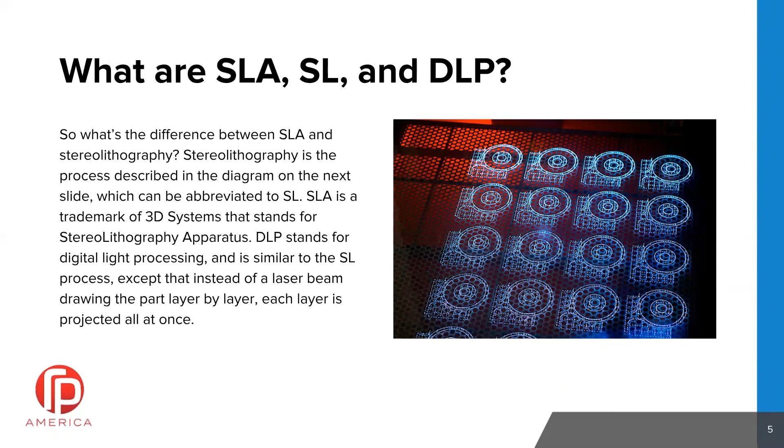So SLA, SL, and DLP. What is really the difference here? So stereolithography, or SL, is the typical abbreviation. Most people are familiar with SLA. That term is trademarked by 3D Systems, and it stands for stereolithography apparatus. DLP, that's digital light processing. It's very similar to stereolithography, except that instead of a laser drawing each area of the model itself, the DLP will actually project an entire image all at once.

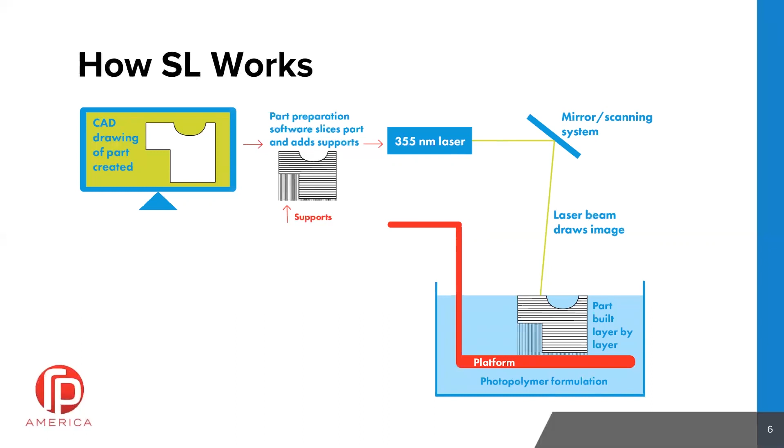So how does stereolithography work? You have a CAD drawing. That's the first part to pretty much any 3D printing operation: you need to have the CAD file. Then we take that CAD file, typically STL, and we will take that into the slicing tool, which will generate support structures as well as break that model down into individual layers. We use a 355 nanometer laser, and that hits a mirror, which we call the scanning system. And then that scanning system is what actually draws the part. So for each layer that's created, the platform will actually drop into the vat of liquid. A recoater blade will sweep across and level out the liquid as well as remove any air bubbles. And then we just repeat the process until it's finished. And when it's done, the part automatically just raises up out of the liquid and starts to drain.

So the foundation years, we're going all the way back to 1982. Acrylate-based formulations were the norm back then. They required speed of reaction and overall cure to generate the properties for early stereolithography. The materials were usually very highly viscous, so they were really thick, and there were complications that come along with viscous materials like that, so the recoating challenges and things like that. There were also problems with shrinkage, curling, or distortion. Large parts were not very accurate across a wide range or a large size. So part accuracy was kind of a problem.

Poor strength of the laser cure. With the resins, we were really starting to understand how the process works. So we ended up having poor green strength. The parts were very brittle. Acrylate chemistry in general is a difficult chemistry to get accurate and keep accurate. So that's kind of how it started. And this is really a big part of the misconception moving forward.

Stereolithography, generally people think that it's really expensive and the parts don't last. If the part gets knocked off the table, it's going to break. That was the case in 1982. That's no longer the case at all. If I am presenting in front of people, this is where I'll take parts and literally throw them on the floor. They hold up, they're durable. Different materials have different properties, and it just all works out better.

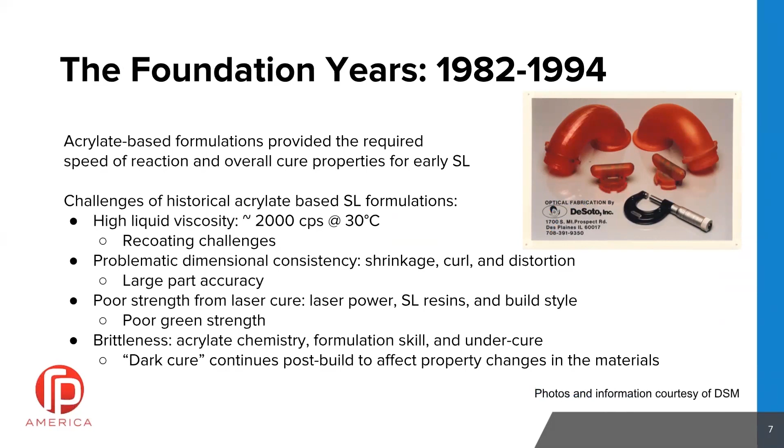So as the years progressed, we get into the 1993 timeframe. We get into these epoxide acrylate hybrid materials, and you can kind of see here the physical strength and the physical properties greatly increased when we get into the epoxy based resins.

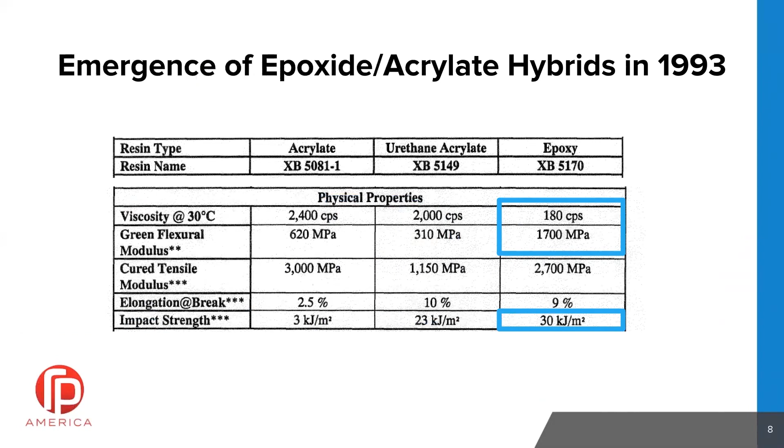So then we move into the expansion years. We start to really understand what the chemistries can do for us, and try to mimic materials that have the properties of thermoplastics, like ABS for injection molding. If you're not terribly familiar with ABS, that is Legos. That's the #1 thing that people will think about when you think about ABS.

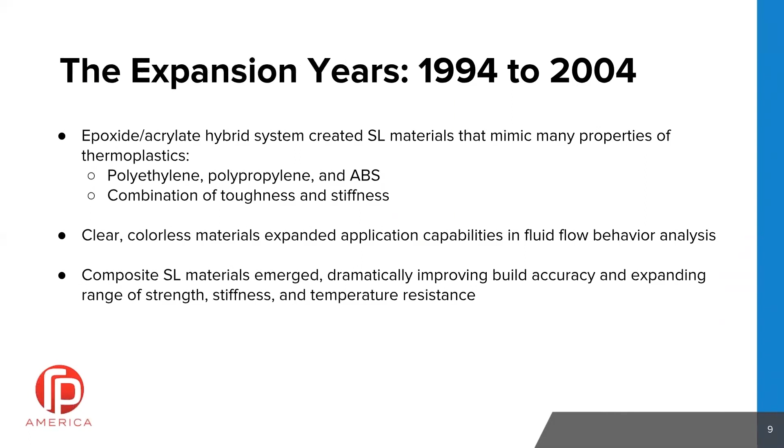Also, we can get into now clear and colorless materials, expanding the capabilities in fluid flow behavior analysis, allowing people to see what's going on or turbulence inside of clear parts that are used for prototyping or material development. Then the composite materials begin to emerge at this point as well. We're going to talk a little bit about composite material here in a few minutes. So we're moving toward that engineering thermoplastics. That's the goal.

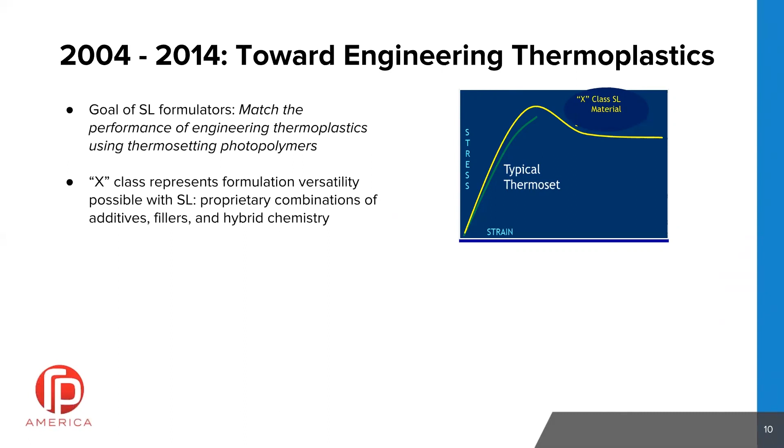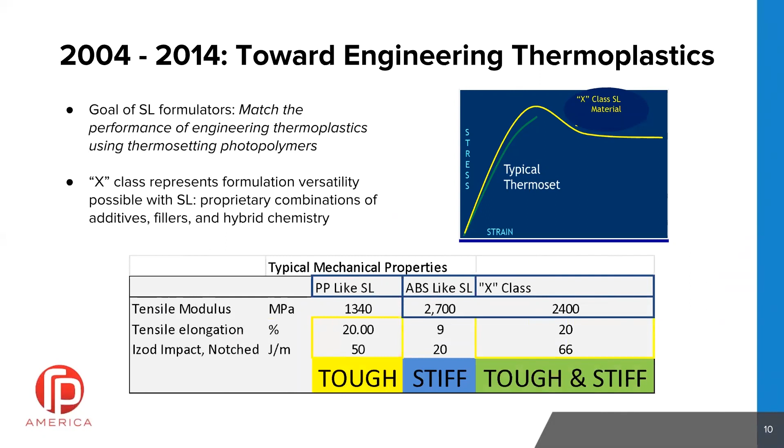So they developed what's called an X class, which is kind of like the next version, or they were really shooting for greater material properties, and so that's where this X class kind of develops from. We're creating materials that have very tough properties, high impact resistance, also decent elongation. ABS is more stiff, so we have a little less elongation, okay impact type of resistance. But when we get into that X class, now we're talking about really good elongation and good impact resistance.

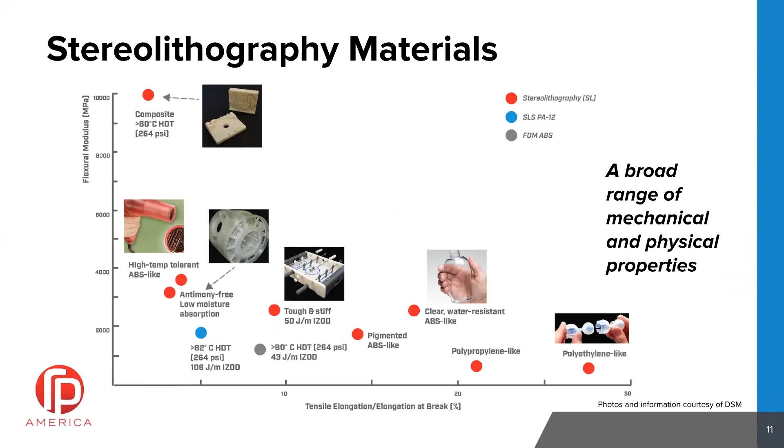So this is just a little graph showing the flexural modulus as well as the tensile elongation at break. And you can see if you want parts that are not flexible but have a really good temperature resistance, now we're looking up in those composite materials. If you're looking for materials that have a much less flexural modulus but are really good in the tensile strength, then now you're talking polypropylene-like materials, and there's just all kinds of materials. There's a wide range out there.

So these are some of the materials we're going to be talking about today. First, I'm going to discuss some of the DSM materials. We're going to talk about Evolve, Next. A couple of the clear materials, 11-122 and 10-122. Taurus, which is a great new and up-and-coming material. And Perform. Perform's been around for a while, but this is one of those materials that have an additive that actually gives a lot of strength and different properties.

Then we're also going to talk about a couple of new players out there. BASF has a great new material, and Adaptive 3D, tough rubber. And when we get to that, we'll discuss that a little more as well. So let's jump in here. First, we're going to talk about Evolve.

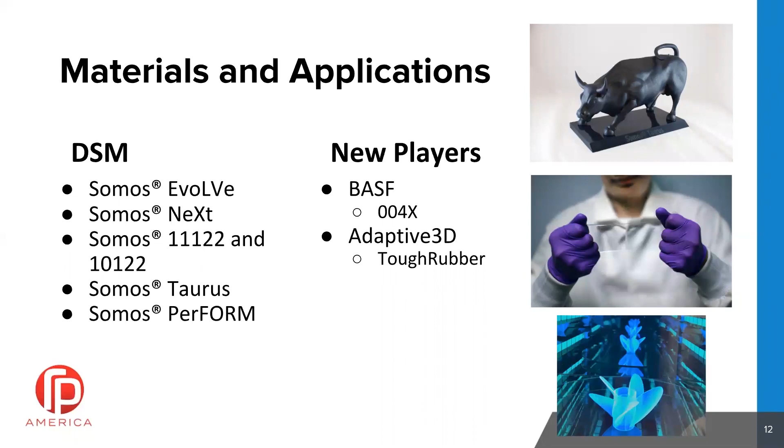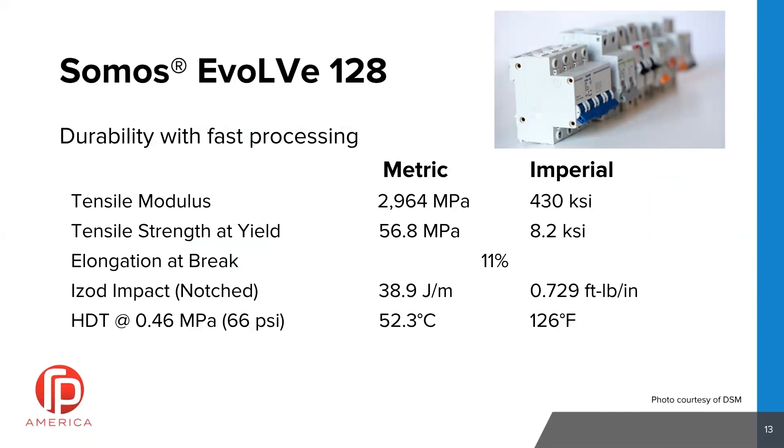So we have some good material properties here. You can see we have really nice tensile modulus, elongation at break, 11% is not too bad. Good temperature resistance as well. 126 degrees Fahrenheit's not bad. It's not going to withstand under the hood type of applications, but most prototyping applications it'll be just fine. So here's an example of Evolve actually being used.

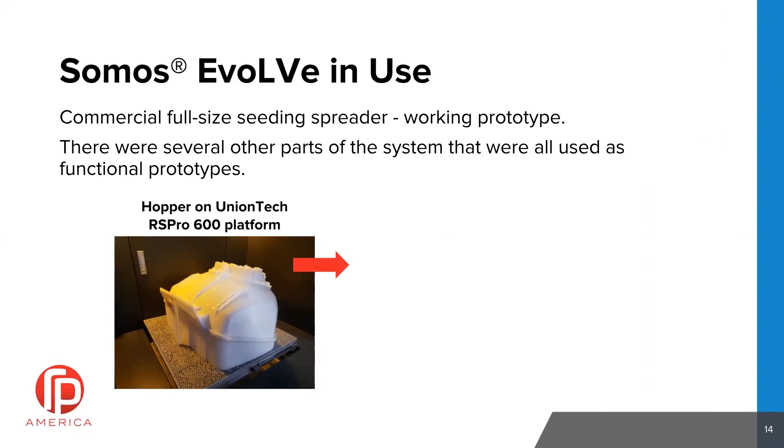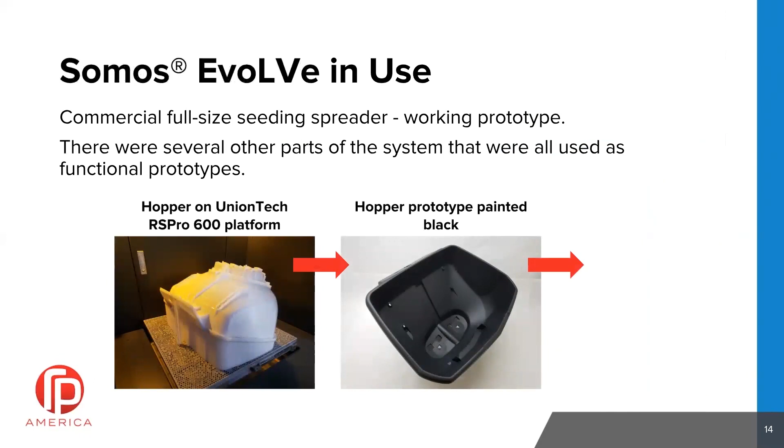So this is a print that came off of one of our printers, our 600 platform, and this was a customer of ours that was doing a prototype for a company. And so they actually built that on our platform. And when I first saw this image, I thought it was just a CAD rendering, and turns out this is a physical picture of the part after it was painted. So printed, cleaned up, painted, and here it is in the full assembly prototype.

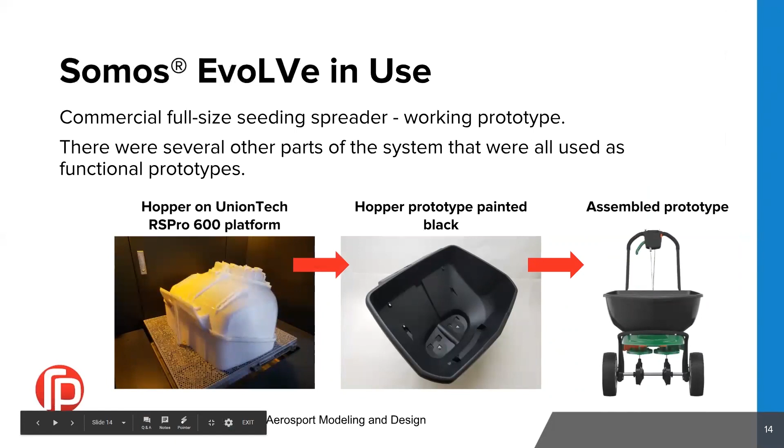And what's interesting about this particular assembly prototype is any of the parts on this prototype that were plastic were actually printed, including the wheels. So the wheels themselves were printed. The shaft or the axle that holds the wheels, that's obviously not. The handlebar, that's metal, that's not. The cables are not. But every other component on the inside that is actually plastic has actually been printed on this part. So functional prototypes, just to open your eyes a little bit, think about how things can be done.

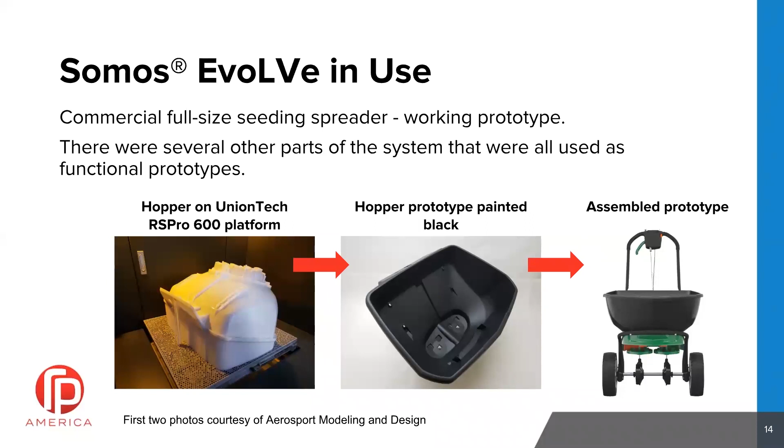Large sizes, very capable. Our 600 is around a 2-foot platform; 600 millimeters is what that 600 represents. So 600 by 600 in the XY. Next, so this is part of that X class of materials.

And so we're getting the best of both worlds here. We have good tensile modulus, we have really good strength at yield. The elongation is a little less, but the temperatures are getting higher. So the impact resistance is also really good on this as well. That image there with the hockey sticks, those are actually 3D printed blades, and you can use them to play hockey. They're that tough, and they will hold up.

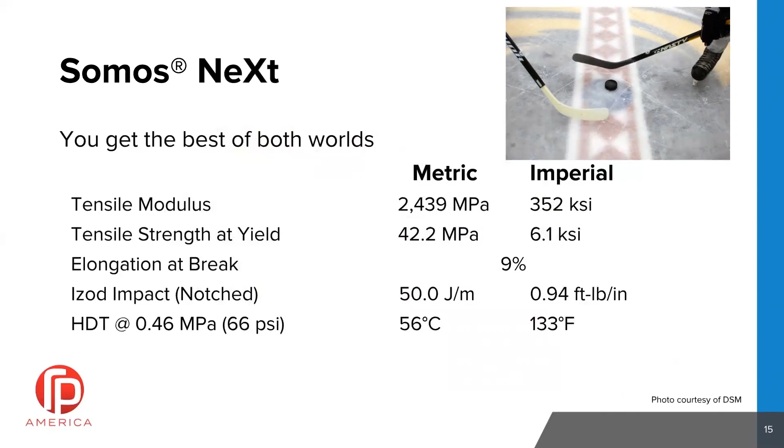Here's a really simple example. We have a little guide here for a router. This company, Gulfstream Aerospace, had been using wood router guides for a long time, but as they would age, the more they would get used, they'd loosen up and just become not as effective. So they actually used this next material and printed a guide, and they're much more robust. They hold up longer, they last longer, and less wobble comes out of the router guide itself. So just an interesting tooling application I wanted to throw out there.

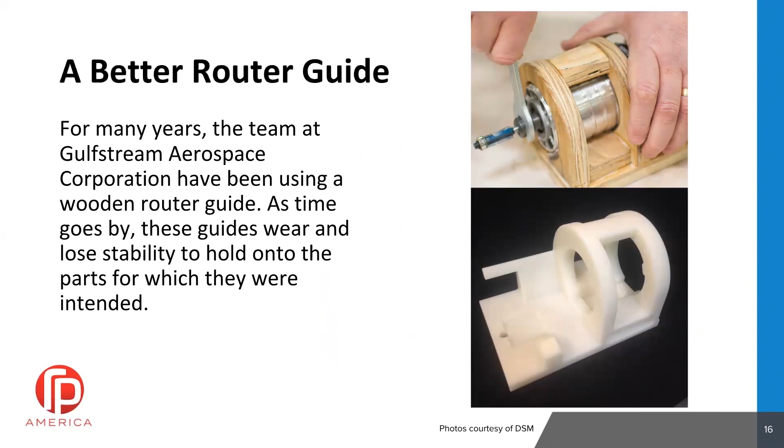I like this one because I like beer. Here we have some brewery tappers. All of those white tappers you see are the traditional methodology. They're created with ceramic in a mold. They've got a foam core. They're all hand painted, and typically, after 2 to 3 months, they need to be replaced because of the wear and tear in the use.

So there was a customer of ours, a service provider, that actually was approached by these guys and pointed them in a direction. So in 1 week, they had a sample. That's the green part there, the green with the purple top. They had a sample within 1 week. That's from CAD through printing. After 6 months of constant use, it's still on tap. It's still being used. The bartenders love it. It doesn't chip. It's been very durable and held up. So we're almost talking about past the prototype stage here. We're into real production or actual production parts.

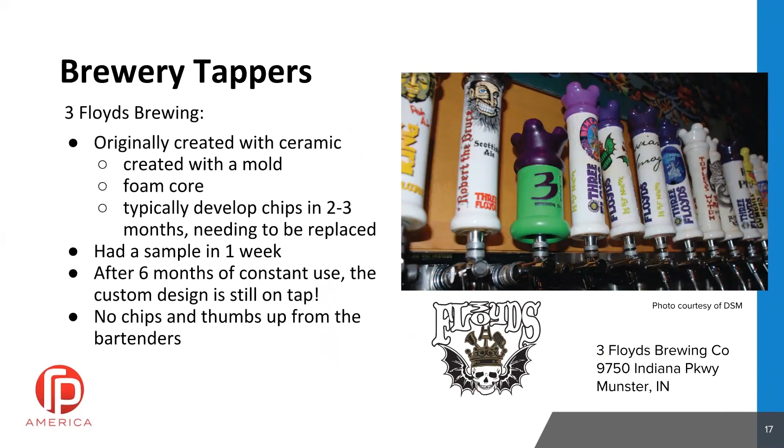All right, let's talk a little bit about some of the clear materials. This first one is 10122. So this has got good strength. This material is not nearly as flexible at 7.5% elongation at break, but it's got decent impact resistance. And this material can be thermally post-cured, and you can see the increase for the HDT from 117 up to 140 by running through a thermal cure.

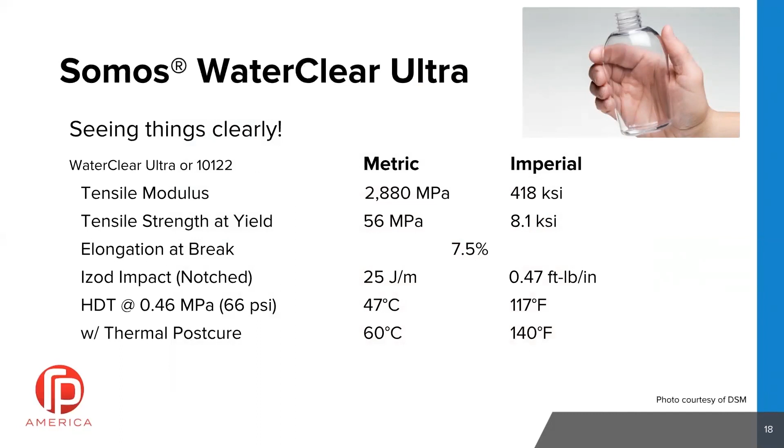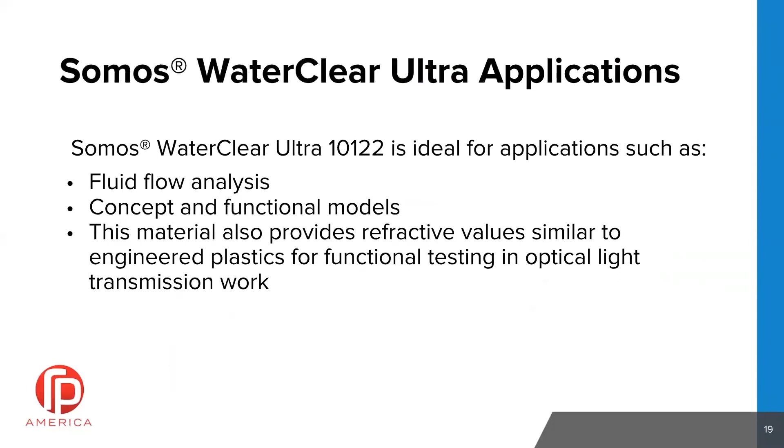Some examples of what this would be used for. This would be good for fluid flow analysis, the concept and functional models. It's also really good refractive values out of this material. This can actually be used as a lens and polished and actually do optical light testing or transmission work there. So there's different processes of making these extra clear. A little bit of elbow grease, some wet sanding usually, and a little bit of clear coat. Even just a clear spray clear coat works really well and really makes these things pop. So post-processing is really not too complicated.

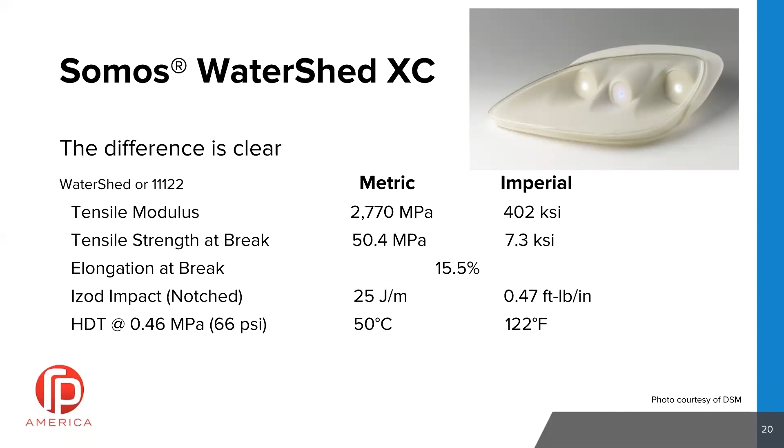That lens in that picture, I've actually had my hands on that. There's 3 separate printed parts there, and the clear part's really just been sanded and clear coated, and has great refractive values. Here's an example. This is actually what the part would look like, very similar once it's come off of the machine without any polishing happening.

It's still pretty clear, but Roush Yates, they actually use this material extensively when they're doing new design testing. It allows for a much faster process to understand what they want the geometry to look like without having to run castings and patterns and go that route. They can print the parts, they can make changes, reprint them again. Because it's got the clarity, you can actually see what's going on, so they can make those internal changes as well without having to do cutaways. They can bolt these things up and actually run on the engine. So in this example, it's cut the design time as much as 45%, and that's really big when you're in a race to get to market before your competitors.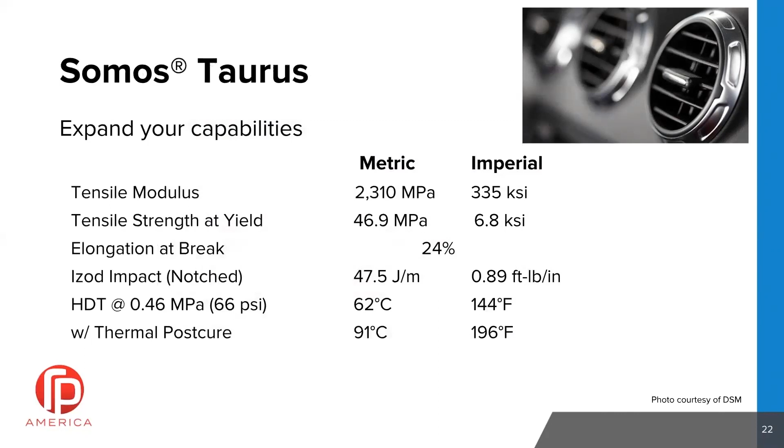So there's a lot of good applications for this material, internally, externally, all around. It's just a really good material for prototyping. It gives superior strength and durability, a wide range of applications, excellent surface finish.

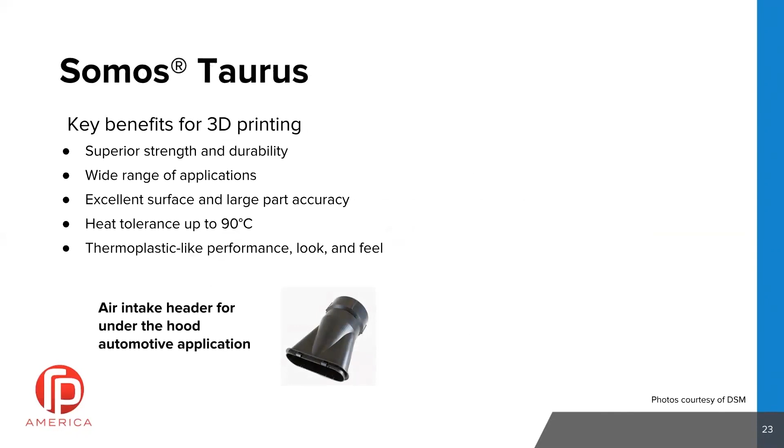Here is a little intake under the hood application from an automotive side. Here, another automotive example. This is an interior application. That's actually an armrest that would be mounted to the door. And then the bottom one's just a close-up showing what the surface finish can look like, without a whole lot of effort or post-processing.

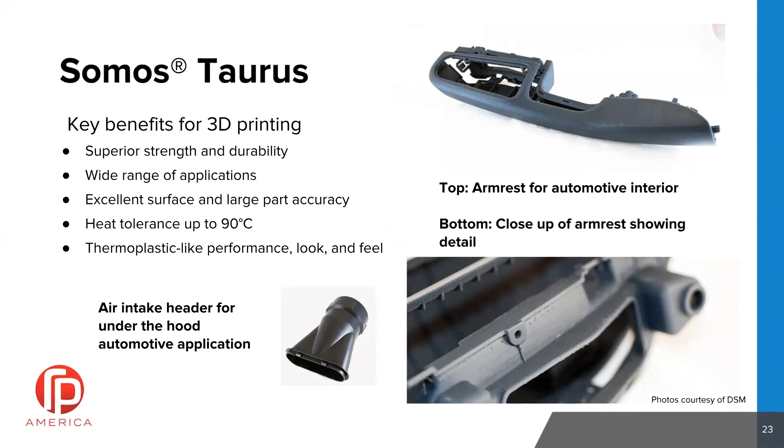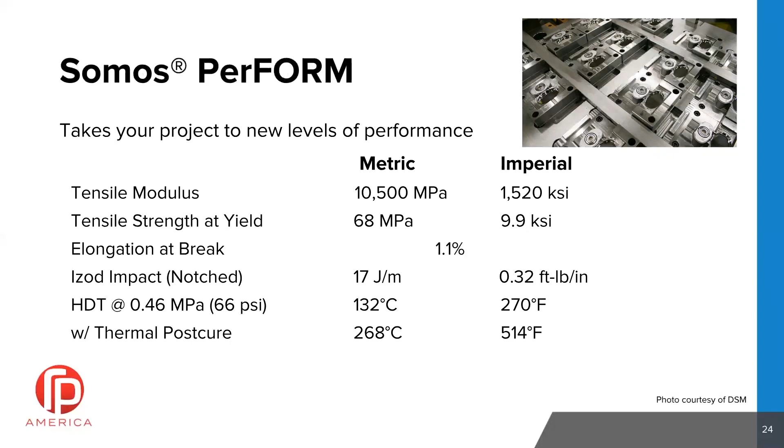Perform. So this is a composite material, and really high tensile modulus. This material is incredibly strong. It's used very widely in Europe in wind tunnel applications because of how stiff it is. So that's one example of a great opportunity to use this material. But it also has really high thermal resistance as well. The ceramic additive in this material really helps with those types of applications.

So here's a little example. This was a Formula SAE college racing team that was struggling to find a material that was going to hold up to this particular application. Under the hood, 200 degrees Fahrenheit, they need to be able to do that. They also had some carbon fiber runners that would soften as they approached 175 degrees. So they needed a material that was going to be able to do better than that.

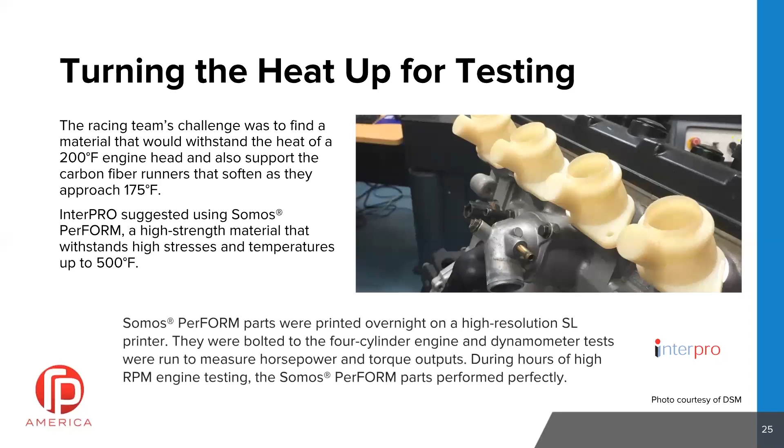So Interpro is a customer of ours, and they suggested using Perform because of its high temperature resistance and ability to withstand great stresses. So these parts here were printed overnight on a high resolution stereolithography printer. They were bolted to the engine and run through dyno test to measure the horsepower. And during hours of high RPM engine testing, these parts worked perfectly. So we're talking about parts under the hood in applications where you have high temperatures, and these parts hold up. So just a great example there.

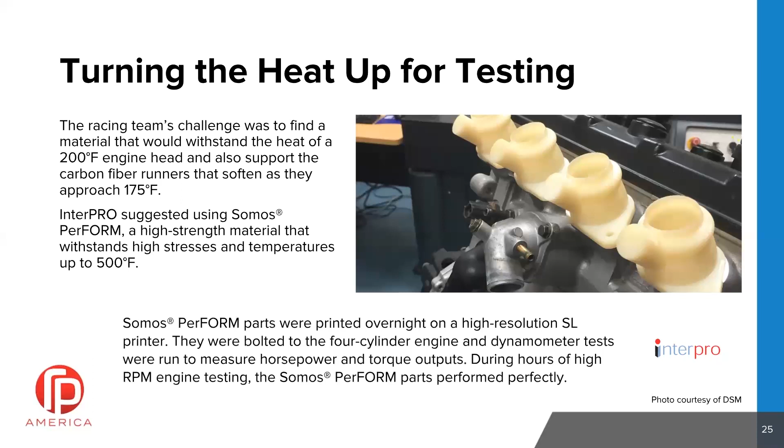If the parts are simple, you can still do a mill or a mold that can make sense. But if the part gets more complex, then additive is definitely the way to go. And this material provides opportunity to do that. Additive manufacturing can speed up the process, 1 to 2 weeks compared to 5 to 7 weeks. You could run through multiple iterations in this process before you'd ever get your first mold that was cut.

So we actually are dealing with a couple of customers right now that are very highly interested in this. We've done some examples where they were injecting a Velox material that had a melt over 500 degrees, and we were using these mold inserts, and they performed flawlessly. Sometimes a little bit of post-processing is required, a little polishing of the parts helps. But other than that, if you use a little bit of mold release, these parts come out great.

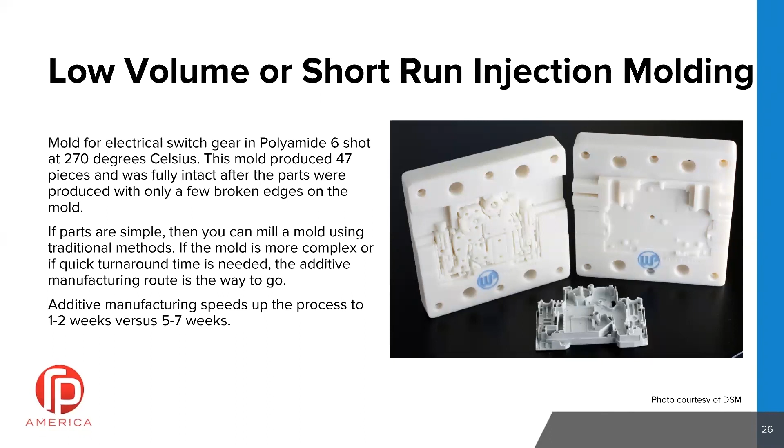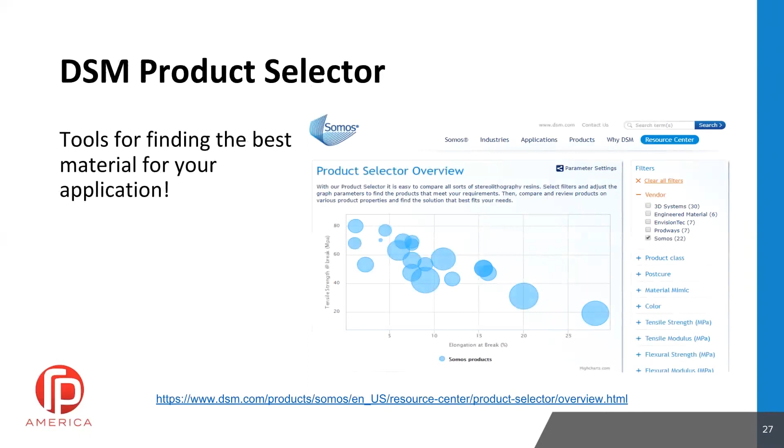This last page here I want to talk about. This is a product selection tool from DSM. This is actually on the web, and I just want to bring this up real quick and show you what this looks like. So what we have here is a nice little graph, and when you mouse over one of these materials, it tells you the physical properties of those materials. Now, we're looking here at elongation at break as well as tensile strength.

If you come up here, you can adjust these parameter settings to any of these in the X and Y. So it gives a real good opportunity, if you're looking for very specific properties, this can help you understand that. You can also compare different vendors. So if you want to compare it to, say, 3D Systems, you can see where their materials fall compared to DSM's materials.

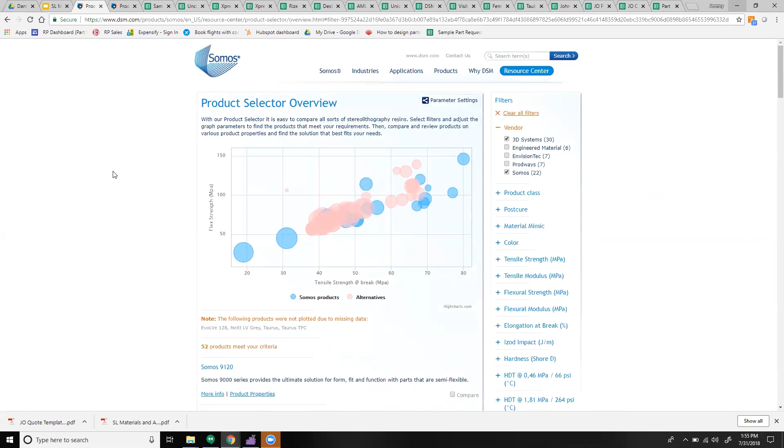Now, again, this is only just an example. I just wanted you guys to be aware that there are tools like this out there, and DSM has a great tool for understanding what this can look like. Okay, so next we're going to talk about material from BASF. This is a new material.

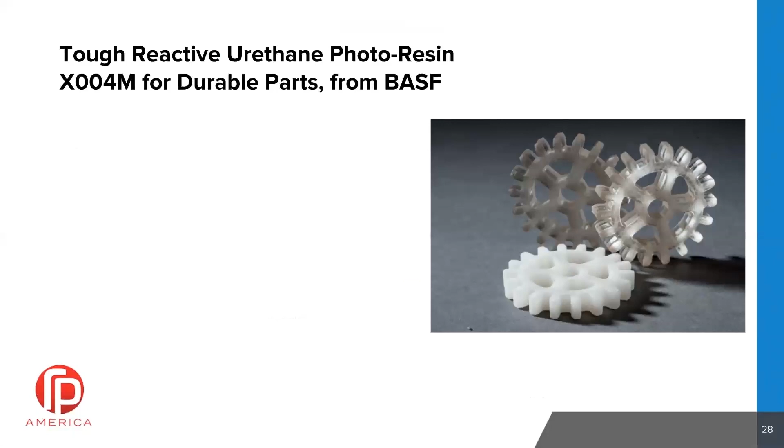It was actually first released this year, and this is a urethane-based material, so it acts a little bit differently, but the end results end up the same. You get good parts, whether they're prototype or functional sample parts. Good impact strength, good build speeds. They can be transparent. You can use colors as additives. They can be painted, like all SLA parts can be painted. Good thermal and UV aging stability with this material.

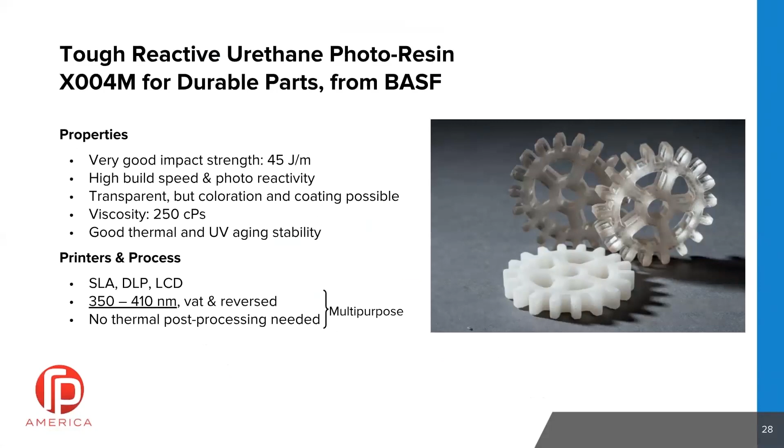This material also can be used at different wavelengths of cure. So it could be used for a high-end professional machine at 355 down to a lower one; a Formlabs type machine would work with this material as well. Actually, this is just some material properties on this material. Good tensile strength, not too bad HDT, and flexural is not too bad as well.

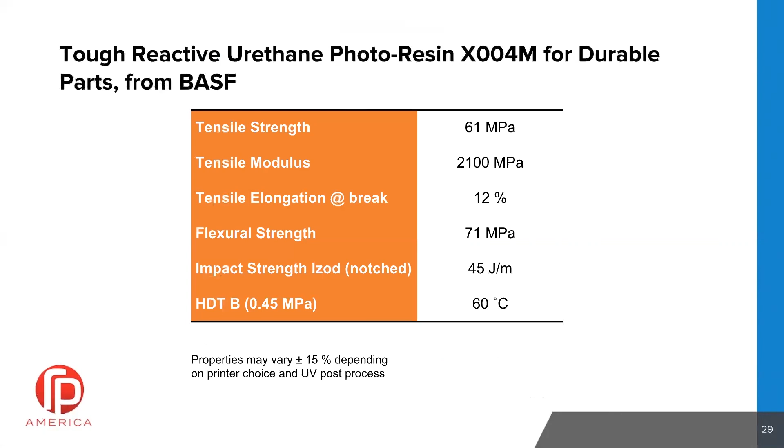Here's just a couple of simple little examples. We have good impact resistance, dimensional stability is really good, thin walls, high detail is possible. Just a couple examples here: a gear. This is a foot pedal for a bike. That's a clip for like a strap, so you can see that the flexibility is actually there too. Some electrical connection. If you're looking for some custom electrical connectors, just a good example for that.

An impeller and a propeller, kind of showing just the fine detail and clarity you can get. Functional and prototypes, performance, good fit and form for demos, jigs and fixtures. It's a really good application for that as well.

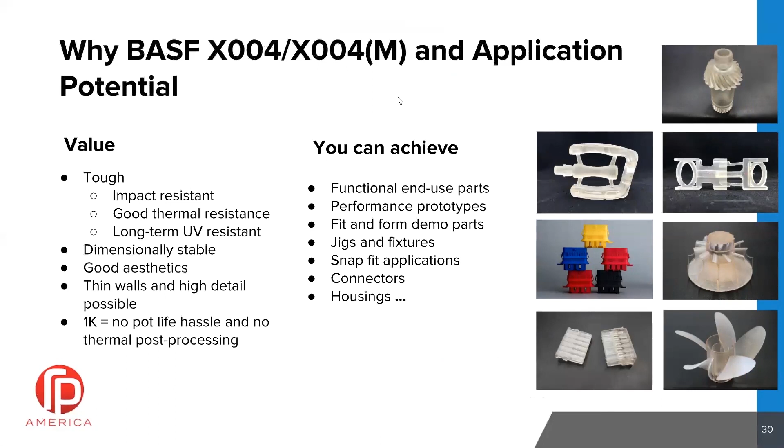Okay, Adaptive3D ToughRubber. This is a new player. This material first became available in, I think it was April, at Rapid TCT this year down in Texas. And this is a really interesting material. We're really excited about this material and what types of applications it can be used for. We have really good tensile modulus, and the important piece here is the elongation at break, 450% elongation at break. Got a Shore A hardness of 90, which is really pretty good.

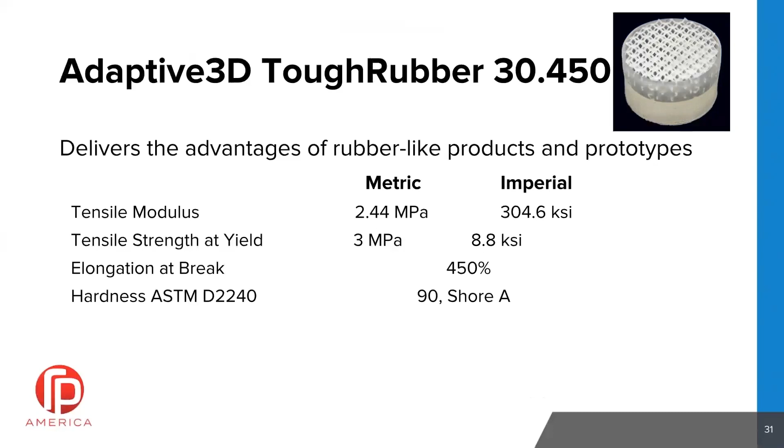This material does not act like an elastomer where it just responds immediately. So when you actually compress this particular version of this material, it takes a little time for it to rebound back to its original shape, but it always does. We've pushed on this material pretty hard and contorted it. I've actually seen sheets of this material, just a little less than a millimeter thick, and you can't even tear this material. It's such a good material for a lot of applications.

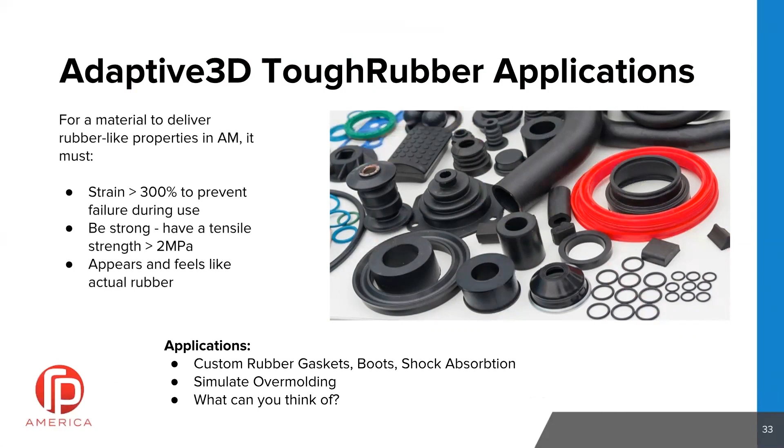Simulate overmolding, so you could actually print this and either glue it or maybe stretch it around the handle to give a good overmold opportunity. And we're really starting to understand what we can do with this material and types of applications. So, I ask the question, what can you guys think about if you could have an on-demand material like this? What can it do for you?

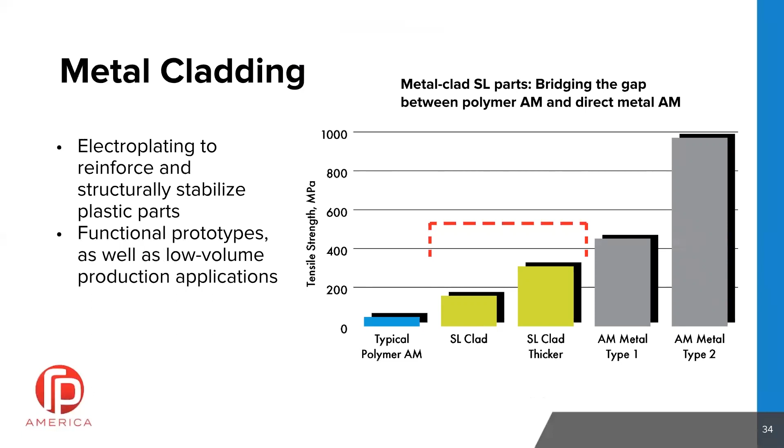Here's another quick thing. We're going to talk a little bit about metal cladding. Stereolithography, because of its surface finish being so smooth, lends itself really well to being metal cladded. So you can structurally reinforce parts. Here are a couple applications. It's not just for strength, but appearance as well.